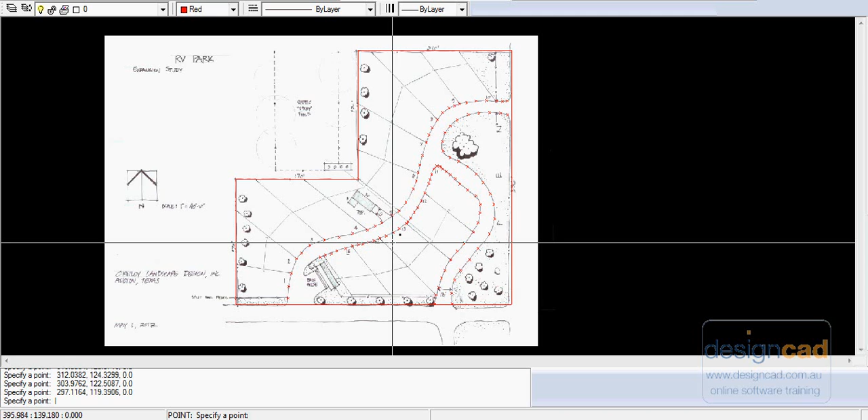Here I'm using the point command in our software to put points along what will be a polyline. This is a sketch plan for an RV park in Texas in the United States. So our units are feet, decimal feet, and what I want to do is use the polyline command to replicate the hand sketch for that roadway through there.

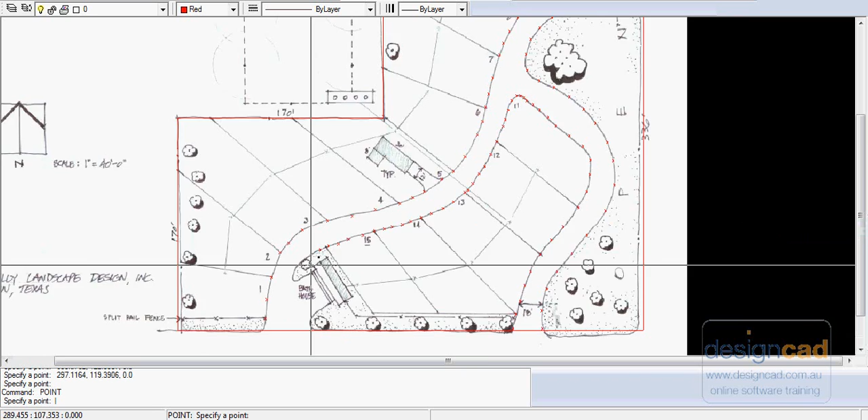So in preparation for doing that, I'm using the point command and putting some points down that I can use to snap to later on when I'm laying the polyline. So the point command, I can right click and repeat the point command, and I'll just zoom in on an area like this so I can just follow over the hand sketch plan in that direction.

When I come to a corner here where the direction of what will be the polyline changes, I tend to put the points a lot closer together. That gives me more control points and more control over the final product. So those points go down, and now I'll show you how to use the object snap settings to jump to those points that we've just put in.

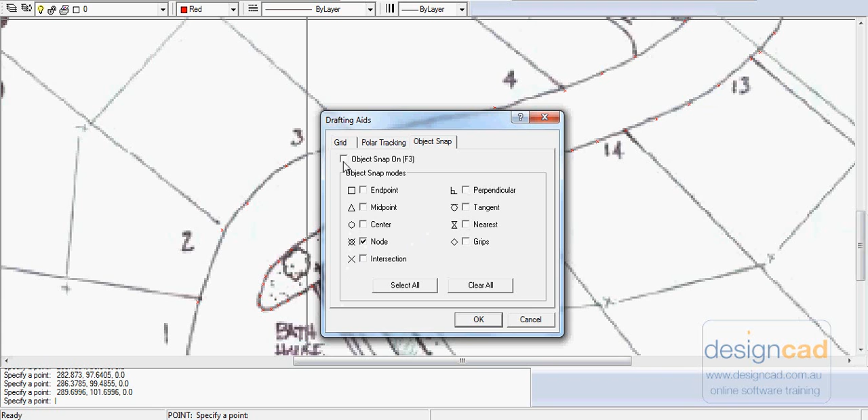I'll take off nearest. What we're interested in is jumping to those point markers, and they're called nodes. So I can say object snap is on, and we're going to jump to a node. So I'll go OK. Now my drawing color is red, just to show you. I could right click to finish, but I'll type the polyline command, P-L-I-N-E, just for some variation, and it's asking me to specify the first point.

So you can see that as I get near that point marker, the polyline jumps to it. So bang, bang, bang, bang, and you can see how relatively easy it is to do. Now in this instance, one of my point markers is quite some distance off the line for the hand sketch, so I don't have to jump to it. I can move away and click and put another one in, and then jump to the next one and to the next one and the next one and so on.

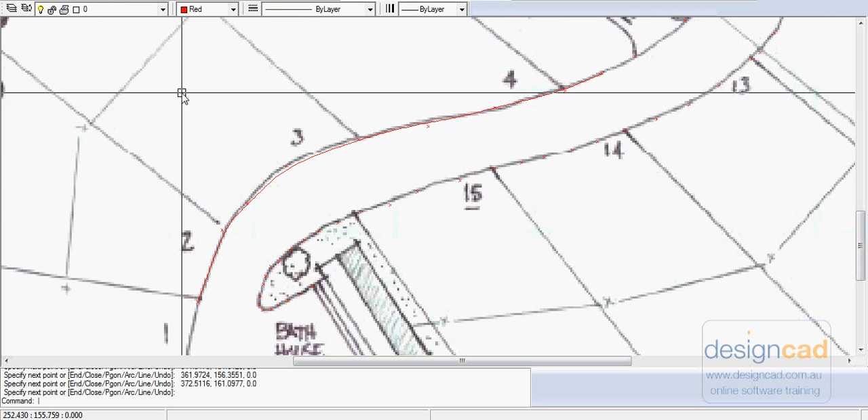And I'll enter, and now we can select that polyline and go to properties, and instead of lines and arcs, let's smooth it. So we'll say that's a quadratic B-spline. So we've done basically some curve fitting through there. If you don't like the quadratic B-spline, you might want to go to a cubic B-spline, and you get perhaps a slight improvement in the curve. As we zoom out, you can see we have quite a nice curve. It'll be the curb edge of the roadway running through there.

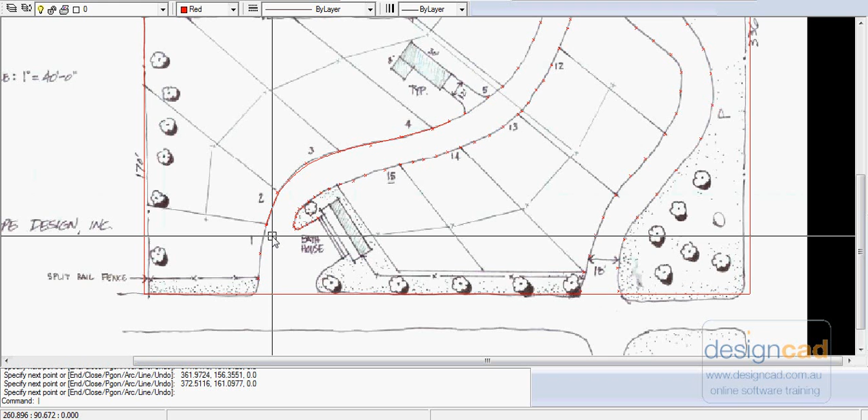So you should be able to see that it's possible to trace over this base map using the polyline command to put the new curb edge in. You might argue that using the point command there's a little bit superfluous. There's no real reason why we can't just use the polyline command as is. Let's just try that. PL for polyline. First point, it's jumping of course to that node there.

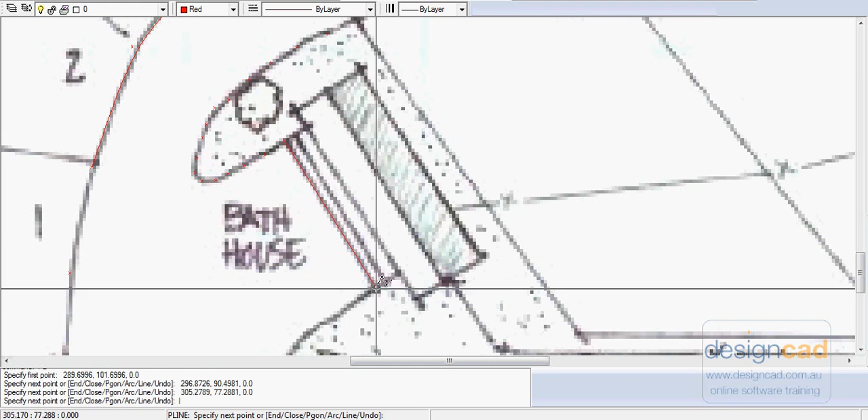Then I can come across down through here, and you may be able to see that the polyline is taking shape automatically. So I'm just tracing over. I'll zoom out and pan up again. So I'm actually putting the polyline in without the need for putting all those point markers in first. And you might argue, and I think I would agree with you, that that's a little simpler. But again, the same holds. Put more points in where you see that the direction of the polyline is changing quite quickly.

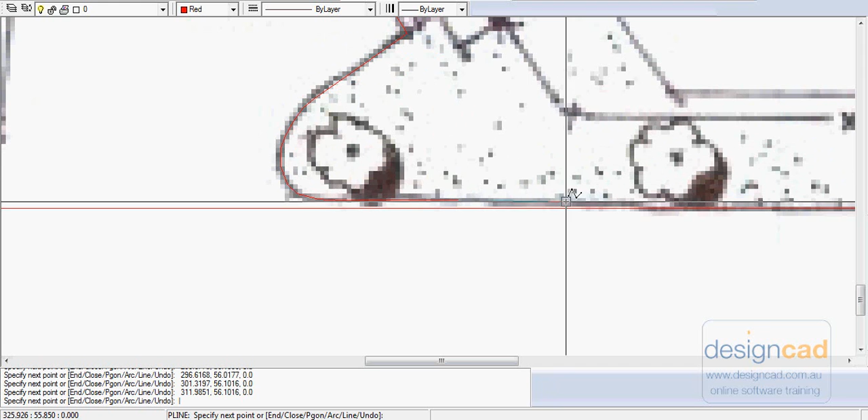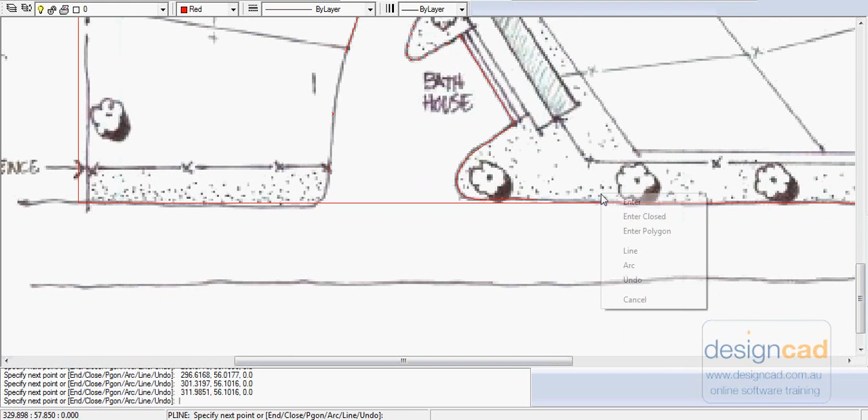Now in this case, we reached the point where, although the hand sketch wobbles all over the place, we probably have a horizontal line running across the screen in that direction, and we might want to turn on our ortho mode. But I'll right click and enter at that point. So here's our new polyline that we've just put in. Now we wouldn't do curve fitting in that instance because that would curve off. We needed that straight piece running through there.

So what I'll do now is finish putting the polylines in, and then we can move the whole drawing, which now sits on top of the hand sketch. We can move it off to the side and start treating it as a DesignCAD drawing. We're just using the hand sketch as a mechanism for getting information in relatively quickly and following a concept plan that the client has already seen. Now we're starting to detail up the plan ready for submission.